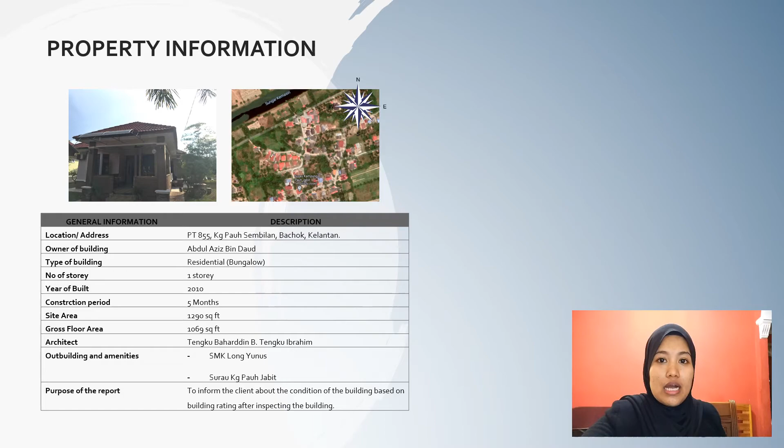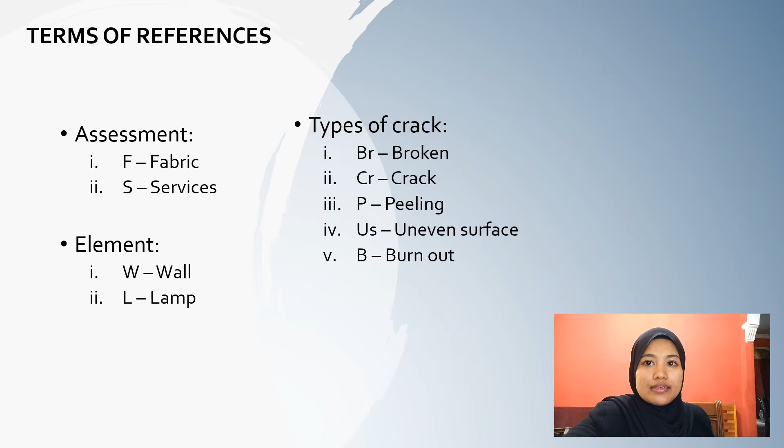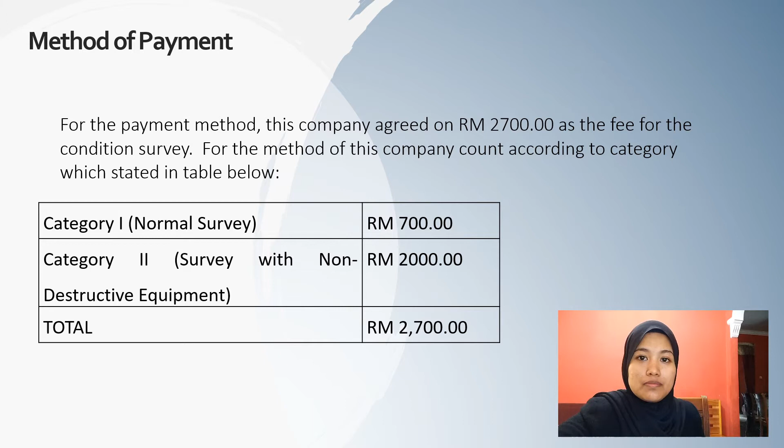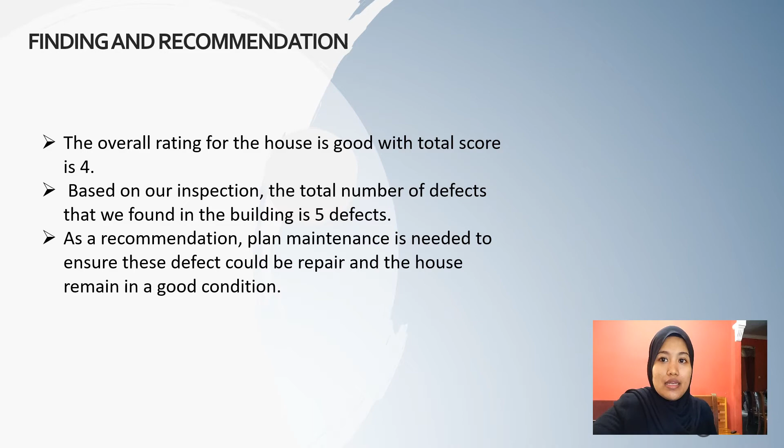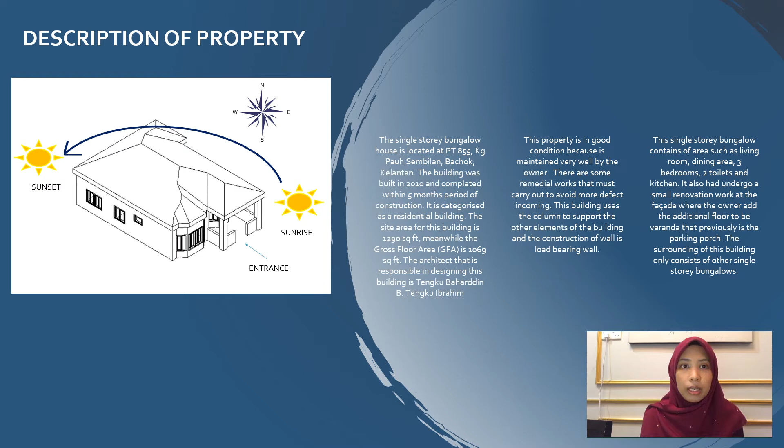So next is the description of property. This single-story bungalow house is located at PT 855 Kampung Pauh Sembilan, Bachok, Kelantan, and it was built in 2010. This property is in good condition because it is very well maintained. There are some remedial works must be carried out to avoid more defects incoming. This house contains areas such as a living room, dining area, 3 bedrooms, 2 toilets, and a kitchen. This slide also shows the illustration of sun orientation for the house.

Assalamualaikum warahmatullahi wabarakatuh. My name is Nur Hafiza binti Uzlan, and I would like to present the method of inspection. In method of inspection, we have 2 protocols. Protocol 1, visual inspection. Visual inspection is carried out to identify the building defects based on the visual appearance that are visible to the building inspectors. The data of the defects are able to be distinguished from this protocol and practice.

For the second protocol, non-destructive testing. Non-destructive testing is carried out to inspect or observe the materials or the elements in place without causing any damage or destruction to the fabric of the building. This protocol is able to provide a specific set of measurements and data in response to the defects.

The procedure for a domestic house. The first one is a preliminary inspection of the whole property to familiarize the surveyor with type and layout. A detailed inspection of the main roof space and any subsidiary roof voids which are accessible. The third one, a room by room inspection at each floor level starting from the topmost floor. The fourth one, inspection of accessible basements, cellars, and subfloor areas.

Next, an examination of the roof structure and coverings from ground level using binoculars if necessary, and from ladders or through roof voids where accessible. An examination of the elevations including structure and finishes. Inspection of the site boundaries, outbuildings, and surroundings. And the last one is examination and testing of drains.

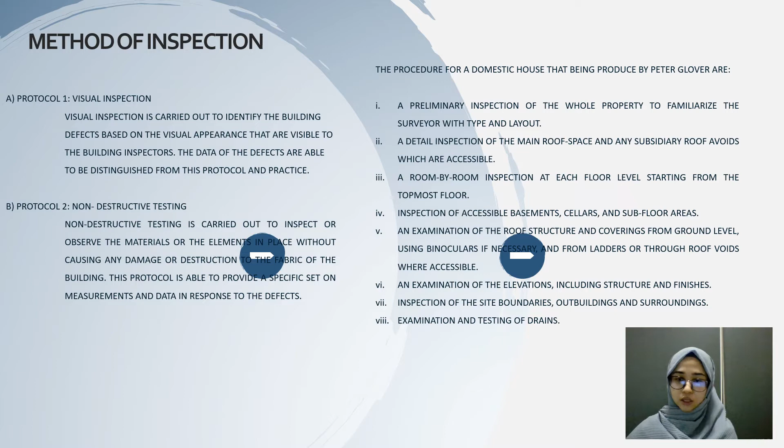Next, we go to the survey protocol. For the survey protocol, we did the work for 3 days, from 3rd May 2021 until 5th May 2021. On 3rd May 2021, Monday, day 1, from 2 p.m. until 4 p.m., the surveyor was only taking photos and surveying the site surroundings, taking pictures of all building spaces and doing visual inspection of the surroundings of the building.

For the second day, 4th May 2021, Tuesday, from 9 a.m. until 1 p.m., the surveyor surveyed the roof condition, the ceiling condition, the wall condition, and the floor condition. We used a digital caliper to measure the cracks. We used a measuring tape for measuring the area of defects. We used a moisture meter to measure the dampness.

On the same day, from 2 p.m. until 5 p.m., we surveyed the electrical condition and the external elements, using visual survey and a measuring tape to measure the area of defects.

And for the last day, 5th May 2021, we rechecked the survey of all defects. We used a measuring tape to measure the area of defects. We used a digital caliper and moisture meter. The tools and equipment we used are a moisture meter, digital caliper, and measuring tape.

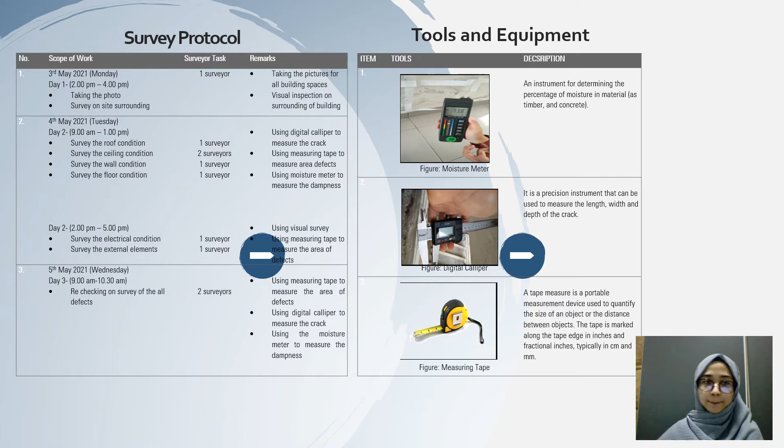Building condition assessment for the external and site condition: there is no defect found at the external of this property site, and the condition of all external elements is in good condition. For the fabric and components, we found defects only at the wall element.

There are 4 defects found. The first is the broken skirting tiles occurring on the wall, caused by human activity as seen in the picture. The surface of the tile is chipping. The condition and priority score is 2, meaning the condition is fair needing minor repair, while the priority is routine. The defect only damages the cosmetic value and needs proper maintenance. Refer to defect sheet F01.

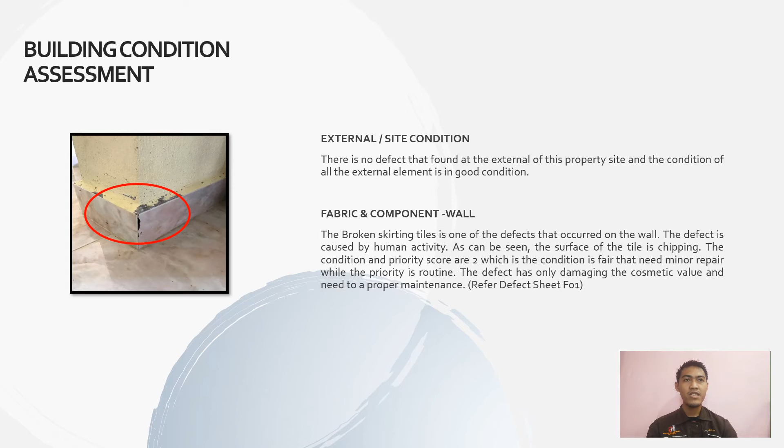The second defect is a hairline crack seen at the wall plaster, caused by shrinkage of mortar. The symptom is a small horizontal crack appearing on the wall plaster. The condition is fair while priority is normal. It is a minor defect, but it could lead to a serious defect if left unattended, as the crack might become bigger and more serious. Refer to defect sheet F02.

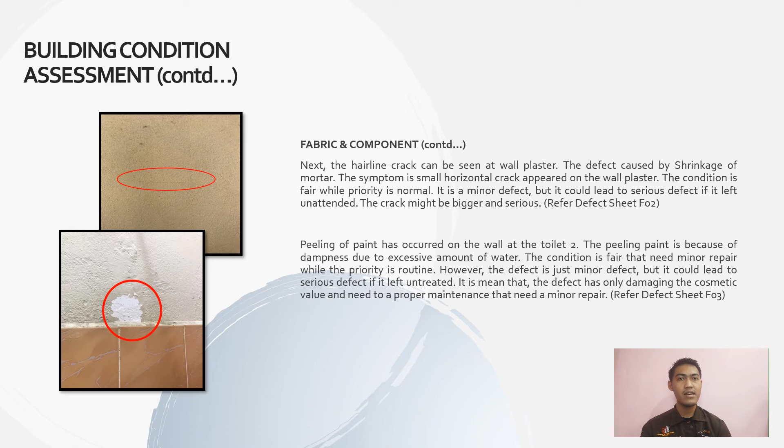The third defect is peeling of paint on the wall at the toilet, caused by dampness due to an excessive amount of water. The condition is fair, needing minor repair, while the priority is routine. It is a minor defect, but it could lead to a serious defect if left untreated. This means the defect only damages the cosmetic value and needs proper maintenance with minor repair. Refer to defect sheet F03.

The last defect at the wall is an uneven surface, as seen in the picture, found at bedroom 2. The defect is caused by poor workmanship. The condition is fair while priority is normal. It is a minor defect, only a cosmetic defect and functional as per provision standard, but it can affect the aesthetic value in future. Refer to defect sheet F04.

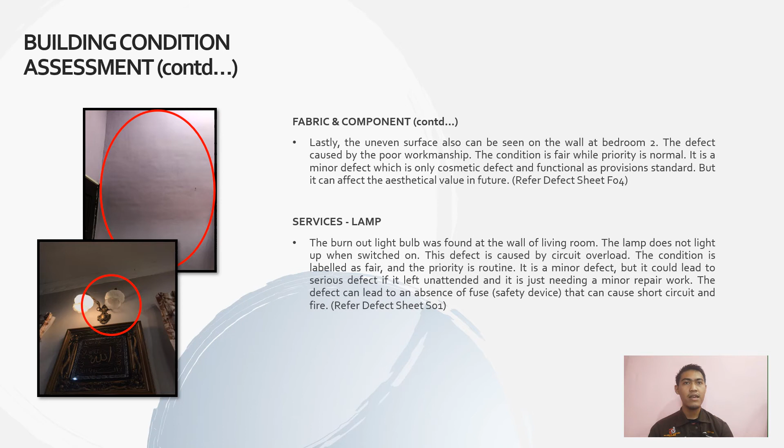For the services part, we found one defect: the lamp. A burnt out light bulb was found on the wall of the living room. The lamp does not light up when switched on. The defect is caused by circuit overload. The condition is labeled fair and the priority is routine. It is a minor defect, but it could lead to a serious defect if left unattended, and it only needs minor repair work. The defect can lead to an absence of a safety device, which can cause short circuit and fire. Refer to defect sheet S01.

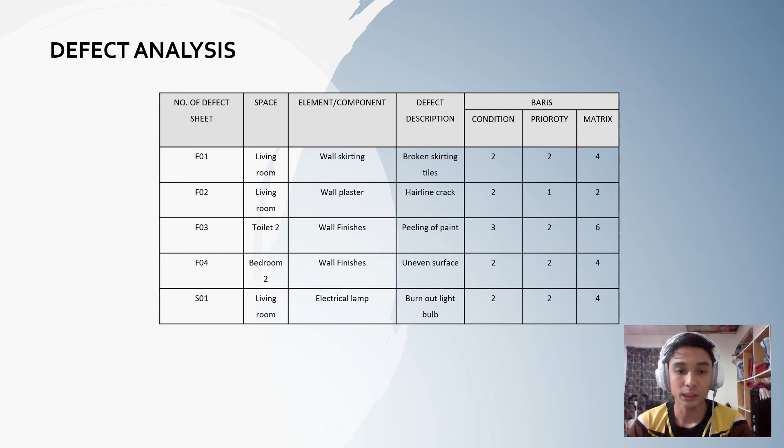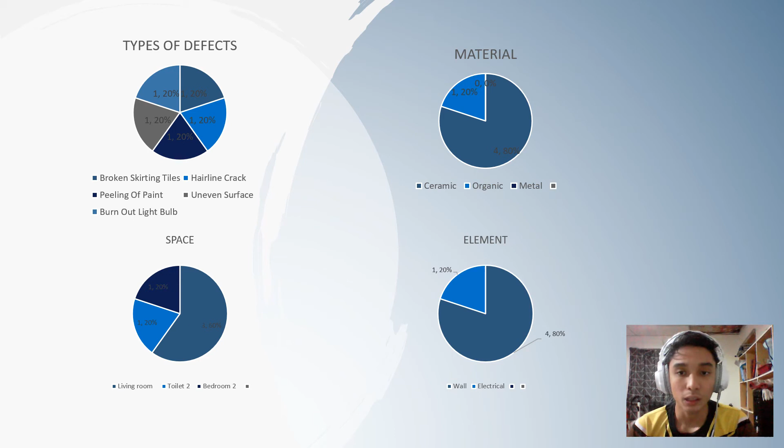These have 4 pie charts, for type of defect, material, space, and element. For the type of defect, there are only 5 defects, and for the material, only 2 materials, which is ceramic and organic. For the space, only 3 spaces, which is living room, toilet 2, and bedroom 2. For the element that defect happen, it is only wall and electrical.

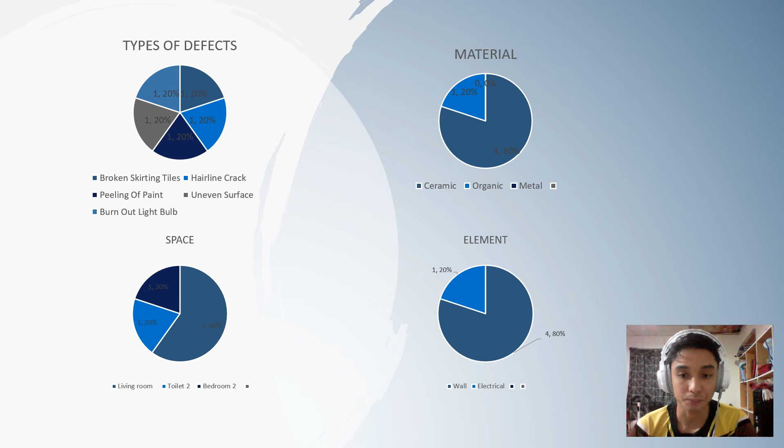For the defect analysis by element and services, only internal wall and services have signs of defect found. For the internal wall, several defects were found: broken skirting tile, hairline crack, peeling of paint, and uneven surface. For services, there is only one defect, which is burnt out light bulb at living room. For other elements and services, no signs of defect have been found.

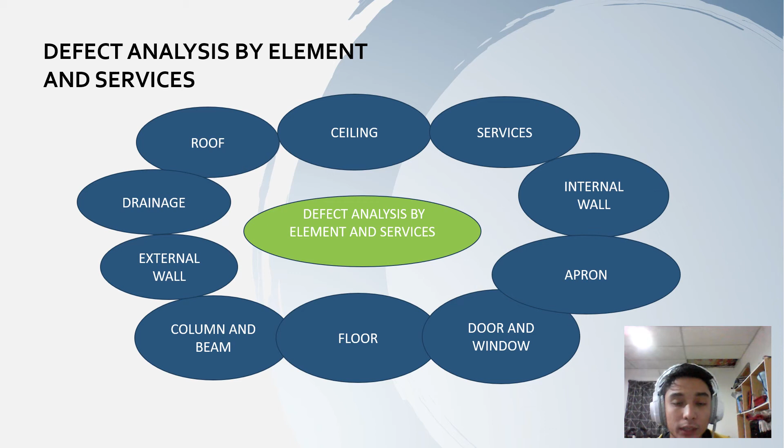For the conclusion and recommendation, this property is concluded to be in good condition with only 5 defects found. The property can still function well, and this property was built 11 years ago.

The defect of broken skirting tile needs the chipped section filled with dab epoxy glue, then work the epoxy into the chipped area using a toothpick and smooth out the top of tile.

For the defect of hairline crack at wall plaster, need to clean the wall area, then cut a trench wider than the crack with the utility knife.

For the defect of peeling of paint, need to remove the paint area using a wire brush or paint scraper. Then make any necessary repair. After establishing a smooth surface, sand the surface to ensure a wall free from any groove.

For the defect of uneven surface, need to spread plastic sheeting or other drop cloth along the base of the wall to protect the floor. Then sand the wall lightly on low areas and a little more heavily on high spots. Then spread PVA primer on the wall and let it dry.

For the defect of burnt out light bulb, need to allow the bulb to cool and then change it to a new bulb.

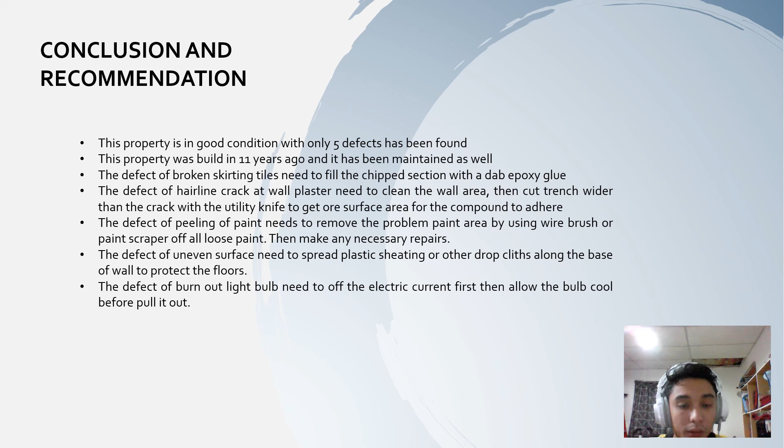Next is the defect sheet for all of the defects found at the building. First defect is broken skirting tile at the living room. The total matrix is 4. The possible cause is suspected to be damage from human activity. The remedial work is also attached in this report for further action.

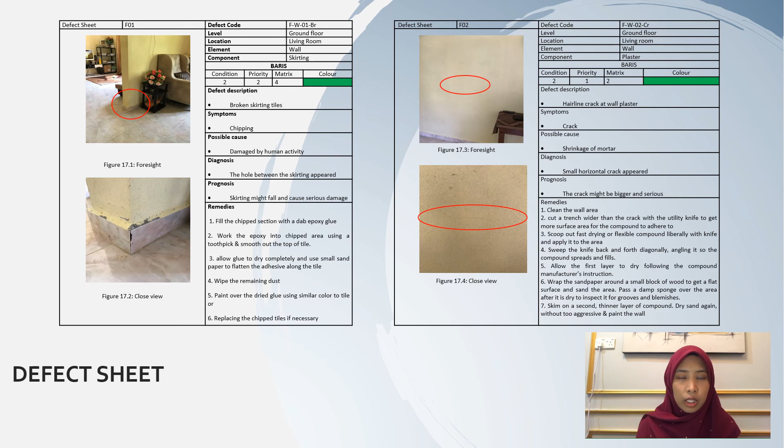Second defect found is hairline crack at wall plaster, located at the living room. The detailed works from cleaning the area until repainting the wall are also provided in the defect sheet.

Third defect is peeling of paint at toilet wall due to excessive amount of water. The detailed works on how to fix this problem are also provided for reference.

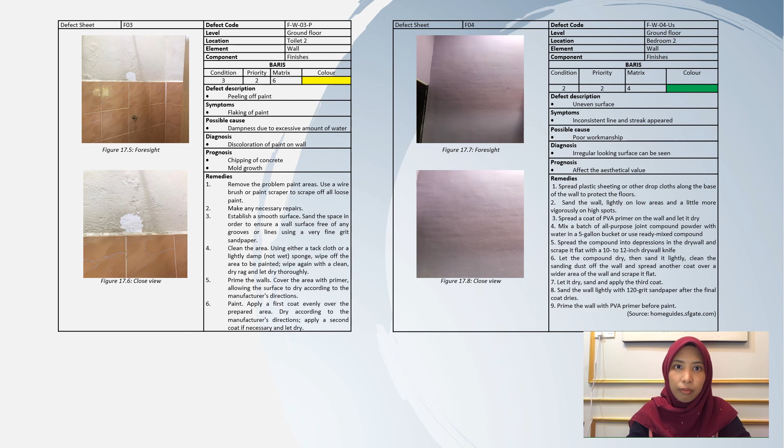After that, defect at bedroom 2, which is diagnosed as uneven surface at wall. This defect might happen due to poor workmanship. A guide from sfgate.com is attached for remedial work.

The last defect is burnt out light bulb at the living room. To fix the bulb, the remedial work is also attached as above.

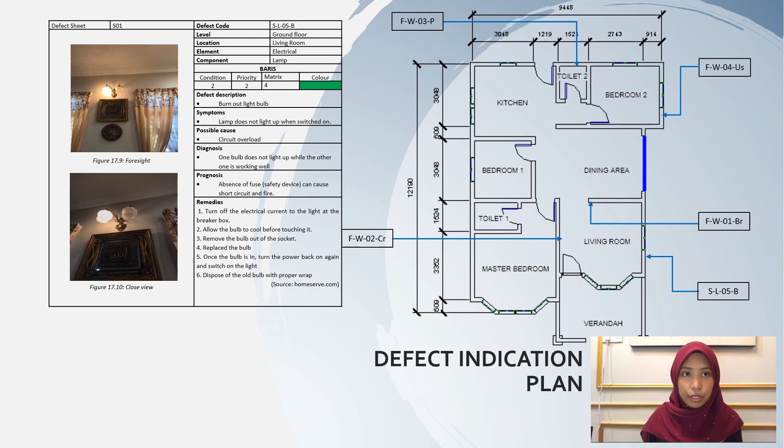In this slide, it also shows the defect indication plan with the coding made by the surveyor in charge to mark every defect found at the area.

Those are the specifications of elements and components found at the building. There are totally 8 doors available at the building and 4 types have been identified as shown in this slide.

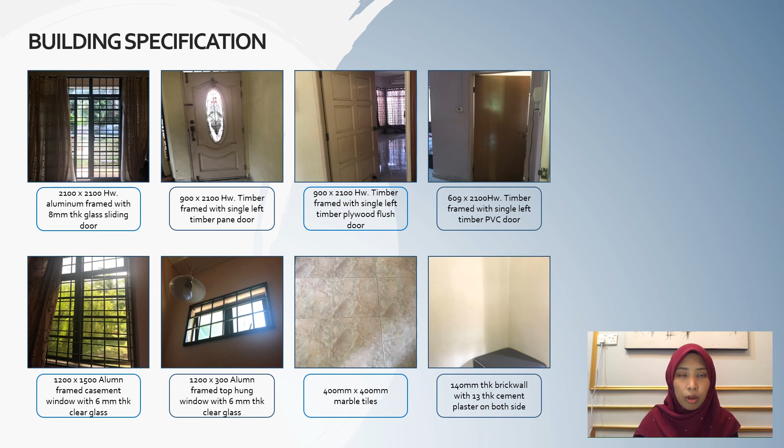2 types of windows were also found at the appointed building, including aluminium frame casement window and aluminium frame top hung window. Meanwhile, the type of tiles used are 400mm x 400mm marble tiles. Lastly, the type of wall is brick wall with cement plaster on both sides.